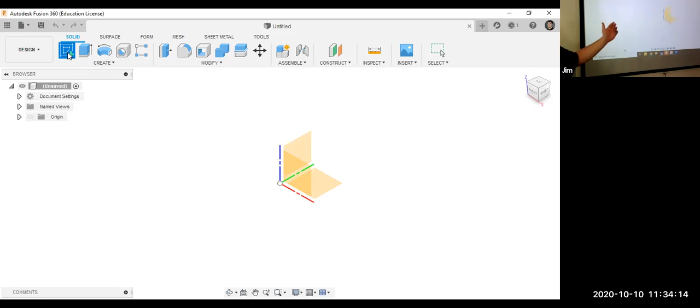So now that we're in the sketch plane, we can use sketch tools. The sketch not only defines our geometry, but it's also where parametric CAD gets its name. We can use parameters to define the dimensions of our part.

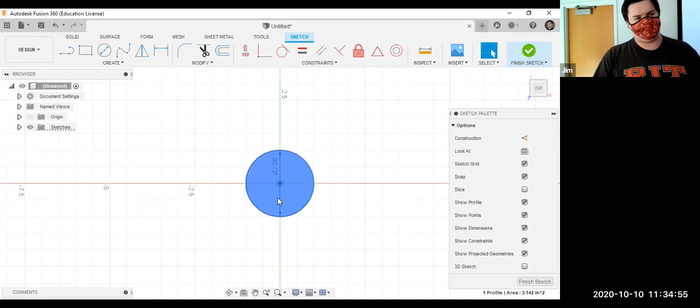So if I were to make a circle, let's say I think I want a pretty small rolling pin at first, maybe 2 inches across. Just type in 2, it's all set. Then if I'm going along doing some testing, I find out maybe 2 inches isn't big enough.

I can go in and modify the parameters of the dimensions to change that part. This applies to any dimension that you put on any part in the sketch, and it also applies to the 3-dimensional extrusion you do of a part.

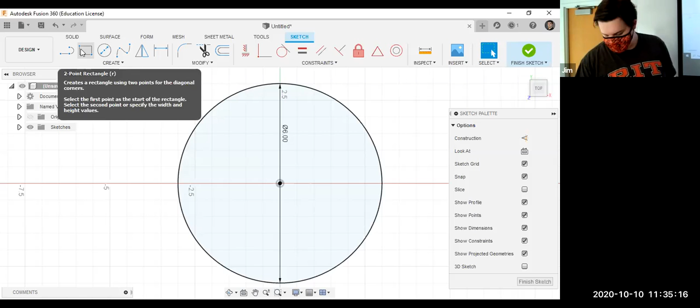You can always go back and edit your sketches later on, and it'll pull that change through the history for you. So if I had already modeled everything and then changed that from 2 to 6, it would just expand to get bigger in the final design.

Let's go over some of the controls for the cameras, and then we're going to do a basic exercise to try and design a part.

So for starters, working from left to right in Fusion, over here you have your browser. The browser is where all of your sketches and parts in this file will be. You can use this to help organize a very large or complex part into sizable chunks that you can select, hide, make selectable or unselectable, or make transparent if you want to work on a part behind them, etc.

Up along the top, you have your toolbox. In Fusion, 99.5% of the time, you're going to be using just the solids toolbox. Surface, form, mesh, sheet metal - those are all more for very specialized design concepts that we don't touch on too much. Within the toolbox, you'll find a couple of different categories.

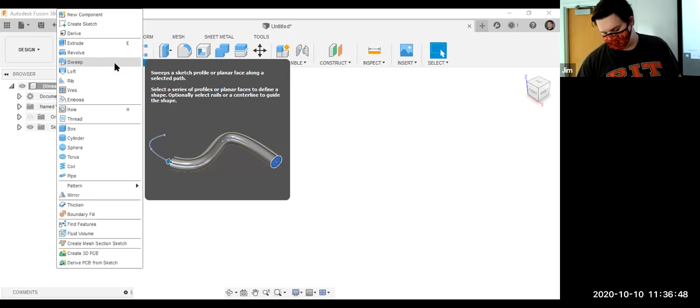Create is where you begin creating shapes. So if you have nothing at all, this is where you would create a sketch and turn that sketch into a 3D body. And if you needed just a very basic common shape, there are shape generators for that.

Once you have a shape, the modify tools let you manipulate it. Maybe you wanted to make it a bit longer, maybe you wanted to cut it in half, maybe you wanted to round over the corners so it's not a sharp piece. This is also where the move tool is, which is a very important tool.

For some of you just opening Fusion for the first time, your toolbar may not look like this. Some tools you'll have to go find in the drop-down menu, but that's inconvenient if you're going to be using a tool a lot. So for a tool you find yourself using time and time again, just click the 3 dots to bring it up to the toolbar, and it'll live up there as a button you can easily access at any time.

Beyond modify, we have assemble. We're not going to touch much on assemblies today, but just as a quick overview, this is how you join together multiple components in space. So if we have our entire assembly of the rocket, this would be how we define how the threaded rod connects to a bulkhead, connects to the body tube, connects to the fins, etc.

Construct creates things that are not really part of your model, but help make modeling easier. So let's say you want to make a sketch halfway between 2 edges of a part, or you want to make a sketch that's at a 15-degree angle to some part you already have. Using this menu, you can create new planes and new edges that you can then use to make sketches on.

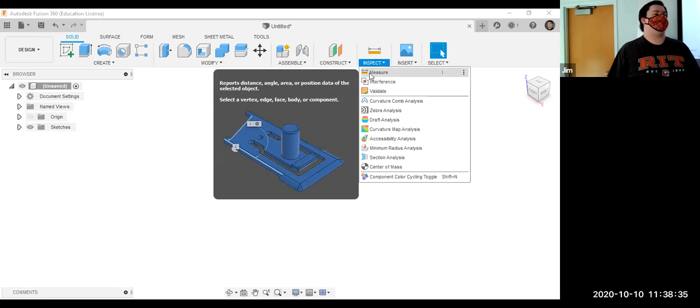And the last one I want to cover up here is the insert button. If you ever need to model something that's a little bit complex and there's no CAD model available for it, you can insert an image of it and then trace the image to get your final part in CAD. We do this a lot to get nose cones from OpenRocket into Fusion 360.

Any questions so far about the interface or any of the buttons that you see on screen?

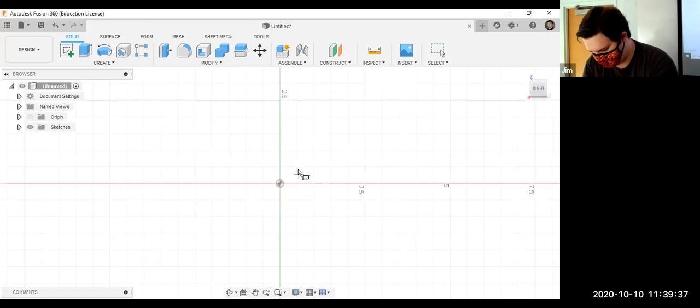One more thing to go over before we start designing a part is how to move your camera. Most of you are probably on a touchpad right now on your laptops, so it's not very easy to move your camera. Luckily, this little cube up here in the top corner is your view cube. You can click on any face to change how you're looking at a part. Let me quickly create a cube here so you can get an idea for how we're doing this.

See, by just clicking on one edge of the cube up here, it'll change our view of the part. This is also useful because it marks what your Z, Y, and X axes are in your design, which is critical for when you go on to manufacture your parts.

When I was messing around with Fusion before, something that annoyed me that was different from AutoCAD was the snap points. That was very different and was difficult to learn how to maneuver objects so they snap to where I wanted them to.

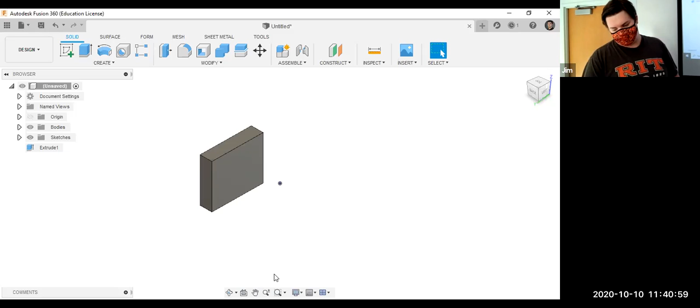Yeah, the snapping in Fusion will be based on how far zoomed in you are to your part, which can be a bit weird at times if you're just on the precipice between 2 different levels of snapping. So if you ever find parts are not sticking where you want them to be, you can hold down the Shift key and it will turn off snapping altogether. Or the Control key will set a fixed snap size. You can also modify a lot of those settings with this small settings menu down at the bottom - your grids and snaps, you can change your snap grid and grid settings.

All right, now that we have a basic overview of how Fusion works, let's go ahead and make a part. I'm thinking something pretty simple. How about a die, a singular of dice? So who has an idea of how we would start to make something like this? Cube. We could start with a cube, yep.

We could do create, and then box, cube, same thing, and pull that out to the shape we want. We could also create a sketch, draw a square, and then extrude it out to the third dimension. Yeah, so whichever one works best for you. For a shape like this, it's simple enough that we could just do it with a box.

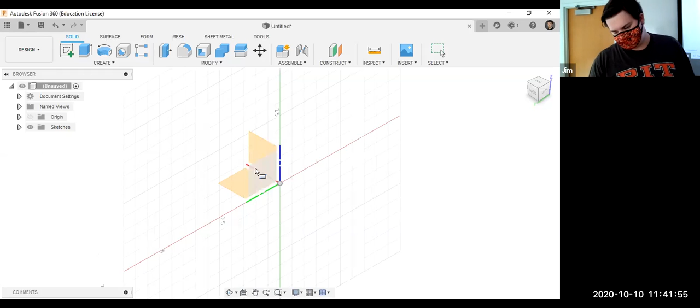Does it create like a hollow box or a solid cube? Creates a solid cube. I think it just calls it box in case there's like, it's not the same dimensions on all three sides.

Yeah, so let's make a die. Also, how do you change from metric to... it's a good question. So if you ever want to use both, if you're typing in a dimension, you could put in like 4.7 inches or 3.7 millimeters, and it will do the conversion on the fly. To update the default for the file as a whole, you go to Document Settings in the browser, select where it says Units, and then choose your new units from the dropdown. If somebody asks a question, they should repeat it. That's a good idea.

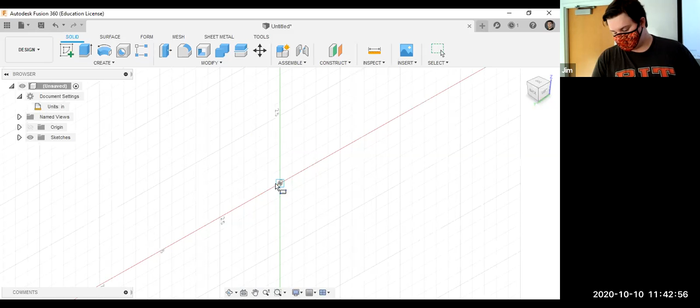All right, so let's make a die that is about 4 inches on all sides. So I can sort of drag the box out into space, type 4 in for the first dimension, hit tab, and then 4 for the second one. And then I can type in 4 for the thickness to get my cube.

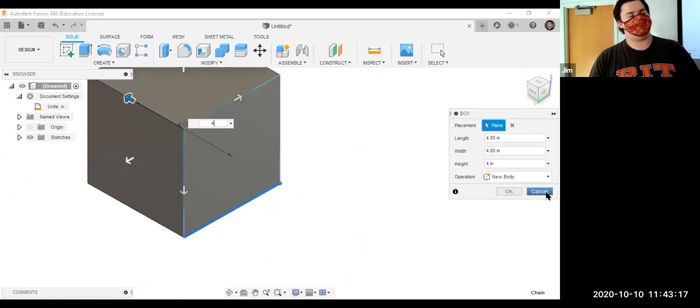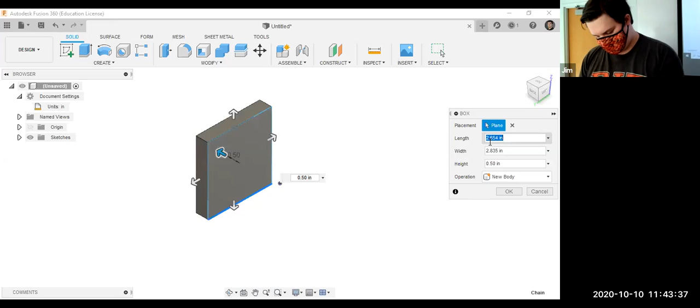Now in your sketch, if you accidentally typed in 3, or you didn't type in any set number, you can just double click on the dimension to modify its value. So if I do that again, or you could also, in the box tool, use the box length and width settings. Like that.

Now you notice at the bottom, it says operation. Most of the tools you're going to use will have an operation selector, and the two most common you're going to use are new body and join, and maybe sometimes cut, depending on what you're doing. New body, as the name implies, makes a new body. If I were to use the join tool, it would take the two bodies and sort of weld them together. And if I was to use the cut tool, it would subtract one body from the other.

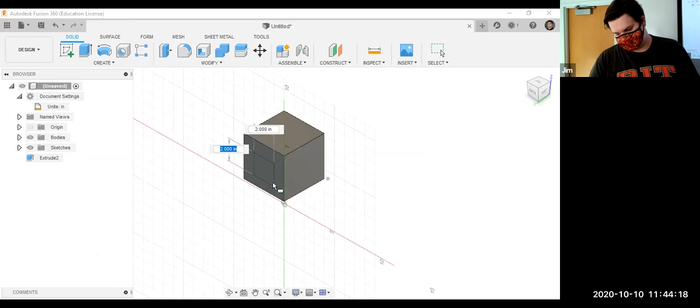So if I wanted to make this a hollow cube with maybe an opening on one side, I can draw another box here and select cut, and you can see it's going to cut away the inside. Or if I wanted a cube with a part sticking out the side, I can do that and then set the operation to join. For now, let's just stick with the single cube.

Did everyone get a cube? How do I move the screen? You can move the screen by selecting the pan tool at the bottom, and then when you're done with it, just press escape. If you have a mouse, it's middle mouse click and drag.

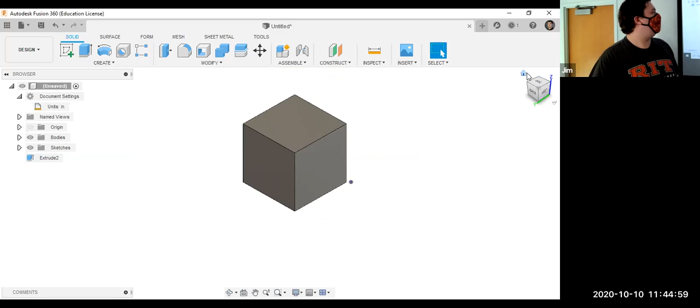If you've lost your part, how do you get back to it? If you've lost your part, you can click the home button up here, and it will bring you back to a default view of your part. So if you ever zoom way too far in, way too far out, and get lost out in who knows where, it'll bring you right back.

Hey Jim, how do I change my default home view? If you want to change your default home view, just go to some new view that you want to set, right-click on the home, and then set current view as home.

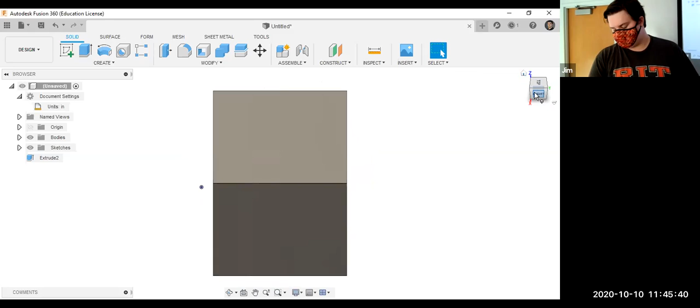For the views on the view box, there are no keyboard shortcuts. Normally you'd be using a mouse instead. To see if anything has a keyboard shortcut, just hover over it and it will tell you. So press pull has a shortcut of Q, fillet is F, move copy is M, delete is the delete key, etc.

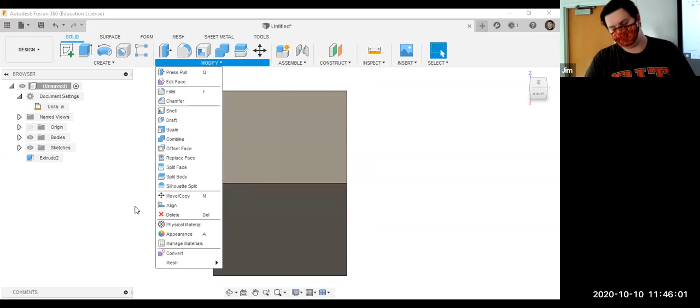What is form, like create form? So click on that. Gotcha. So the question was, what was create form?

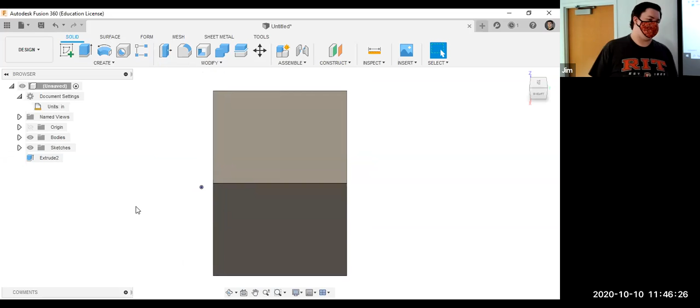In Fusion, we're using right now the traditional parametric, draw lines, extrude things toolbox. Form is used when you are modeling maybe a natural or ergonomic part, like a computer mouse or the handle for a tool. In form, you start with a blob, and then you can press and pull on points of that blob to curve it into the final shape you want. So it might not necessarily be dimensionally accurate, but you get a better surface curvature than you can by just drawing lines.

If you want to get out of the form menu, you just delete the form on your browser and then select solid up at the top.

What's that? Form isn't an option, right? Form is not an option. It's not on top of here.

Interesting, are you using the educational license? I got no idea, that might be why. As students, you get access to pretty much all the tools in Fusion 360 through your educational license. If you signed up using a personal Autodesk account, you only have your personal license for Fusion, which severely limits what you can work on. You'll really see this if you go into manufacturing—the student license can do a ton more in CAM than the free version can.

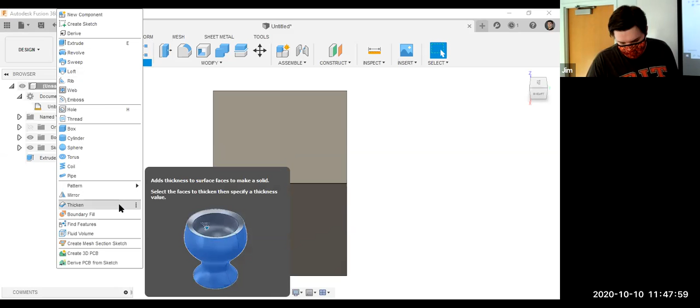Yeah, I have the educational one. It's under the, like above create, there's a purple cube that says create form. Ah, and then it'll take you into. Oh yeah, I see it now. So you probably just have, did I hide it on mine? You have a different tab that says form.

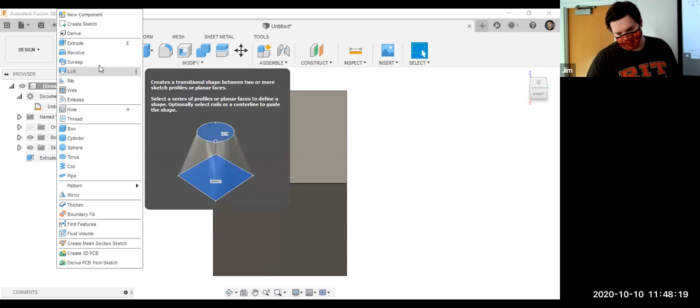Interesting, mesh. So if you have a create form tool up in create, you can hide it if you want by just selecting it and dragging it out, or leave it there if you ever want to use it again. What did I just take off of there? Was that extrude? There we go, move that back. Perfect.

So any more questions about designing the cube? We all got that? Awesome.

Now right now this cube looks sort of boring, just gray. By default, every part you make in Fusion will be out of steel, so it has this very boring gray look to it. For making simple parts that's okay, but if you're making something very complex, maybe you want to know where the center of mass is, you can modify the physical material.

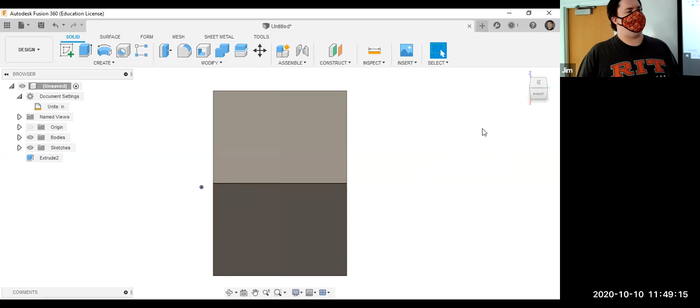Yes? Blue? Do you have it highlighted right now? How do I tell? Just click and drag somewhere out in space. No, it's not highlighted, very strange. Material? Well, let's see if maybe you have a different default material then.

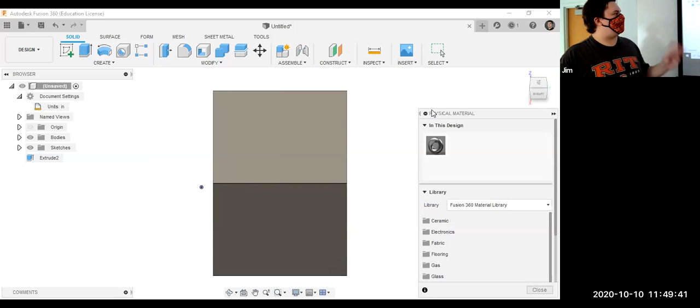So if you go into Modify, Physical Material, this is the Physical Materials Settings menu. This is very important if you're trying to do any center of mass calculations for your model, or if you're going to be doing any renders and animations of your part. If everything is just steel, it looks very bad because it'll just be a very dull gray all the way through, and it also makes it hard to differentiate between parts in a multi-part assembly.

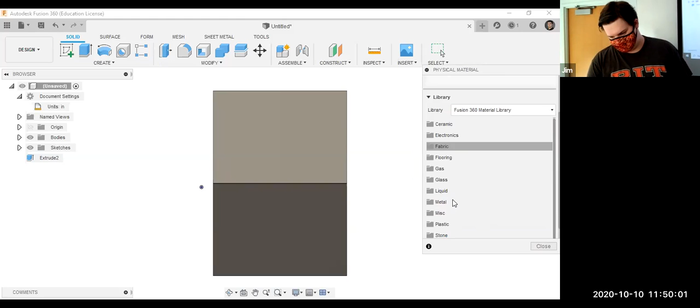So let's change our die to be white plastic, that works. You can go under plastic and see a preview of what each of the physical materials are going to look like on the side. Now if you look closely, you'll notice some of these previews are like a donut shape, and some are a solid sphere, like the clear acrylic. The difference is that anything with a donut shape is a solid surface, so if I were to change this to acrylic, it'll just be that gray color.

But if I was to change it to acrylic clear, I'd be able to see through the part and see the components behind it.

To change the physical material of a part, let's say I want to do this one as ABS plastic—you can click on it and drag it to the body. Or if you want to modify a lot at once, you can click it and drag it to where the other material is in your palette. So say I had 20 parts made out of steel and another 30 made out of aluminum, and I wanted to change all the steel parts to aluminum, I could just drop the aluminum right on top of the steel and it'll change it all for me.

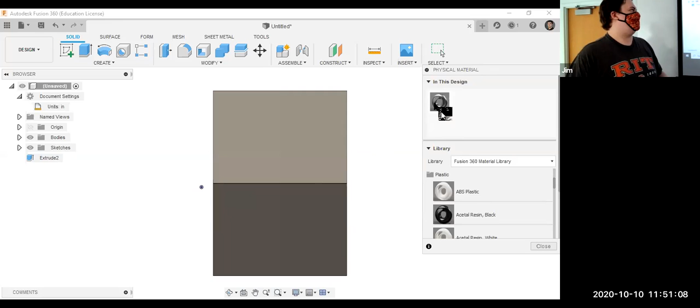It looks a little bit better. Now, what if you wanted to do something that was not critical for the part, but you just wanted it to look nice? Maybe you wanted something that looks like water, or a very glossy paint or powder coat, or even a wood finish.

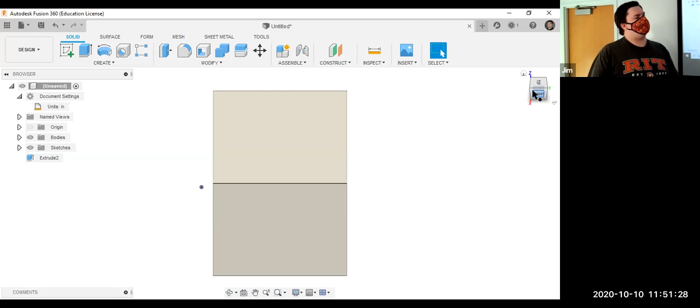Under the Modify tab, there's also the Appearance menu. While your physical material defines your center of mass and the default look of your part, appearances will override the look of the physical material, but not the physical properties.

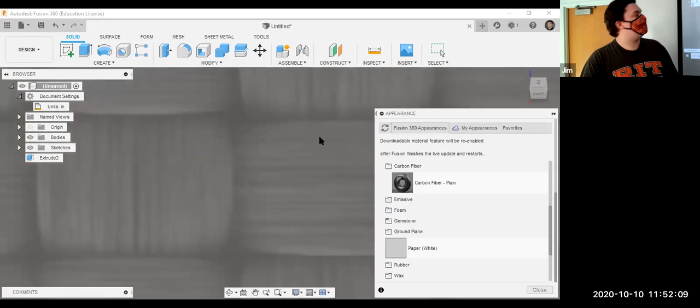So if I was to change this cube to look like paper, it didn't change much, did it? Let's find something a little bit weirder. Here we go, carbon fiber. Now the cube has the look of carbon fiber, but it's still going to have the same mass and strength that it did as the plastic part.

How do you make it? I just chose carbon fiber and then dragged it over. So go ahead and choose some appearance that you like for your die. It can be whatever you want.

Some of them, like the woods here, you see how instead of a donut shape, it's a cube? That means it has some special grain texture to it. So if I was to put the walnut on here, you can actually see the part has a grain.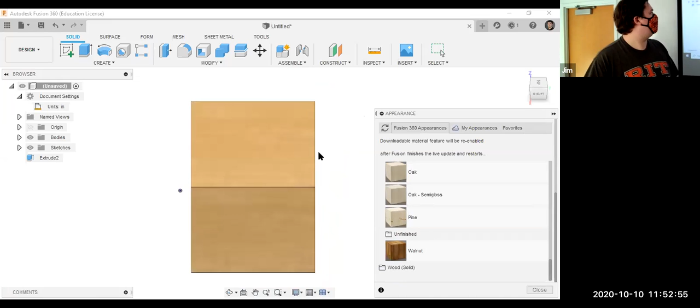And when you go and render that, you can't see that at all, can you? You can barely see it there. So if I was to go and make a render of this part, it would actually cut the grain pattern to make it look like a raw piece of wood.

So I'm going to do paint. Make it carbon. What's that? Make it carbon. I just chose carbon fiber under the carbon fiber menu and then dragged it over.

You might not have carbon fiber as a default. Fusion only downloads a certain number of the models. It's under miscellaneous. There you go. You can also make your own appearances.

Maybe you wanted like red carbon fiber. You can modify an appearance under the My Appearances menu, but that's a bit advanced for today. Let's just stick to the defaults.

Don't we need to fill in the edges? Because the dice actually have rounded corners. Yep, we're going to get to that as well. Don't worry.

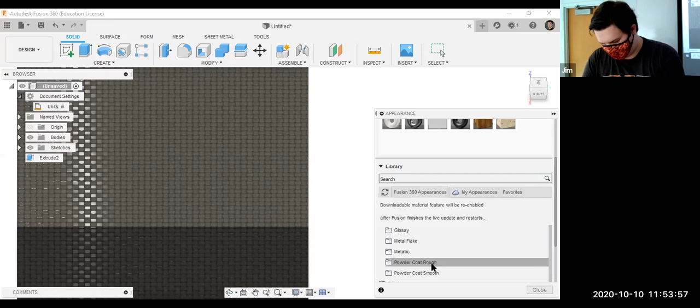So I'm going to make mine powder coated blue. Or I won't actually, because I can't do powder coated blue. You need to download them. Yep, I can't download because I'm running an outdated version. So I'll keep it as carbon fiber.

So obviously, like it was said, this doesn't look much like a die yet. So what do we still need to do? Need to put numbers on it. Need to clean up the edges. So let's put our numbers on first.

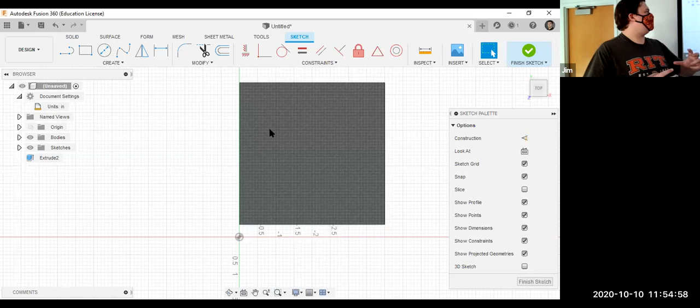To do this, we're just going to make a small detent on the top of the part. Now, since we have 6 faces, let's do this a few different ways to show off how we could do this. So the first way we're going to do this is click Create Sketch and click on one of the surfaces of your cube.

Your view will auto-adjust, so you're looking head-on at the cube now. Let's make this the 1 spot. Well, I can do that. It didn't automatically adjust your view? No.

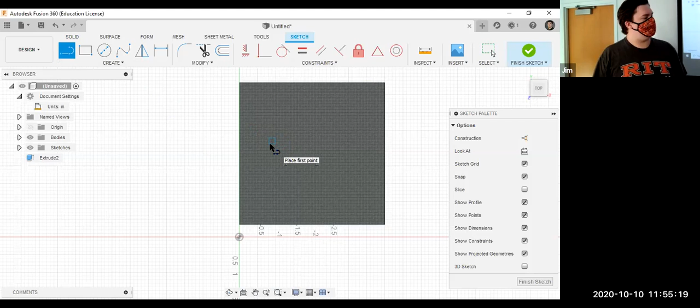Is there a sketch on that surface, though? Can you see the sketch plane? Yeah, seems to have auto orient turned off for some reason. You should change material, this is hard to see. Ah, got it.

So if we're going to make the 1, obviously you need to have it centered, right? You can't just put the hole wherever you want. There we go, that should be easier to see. So how are we going to find the exact center of our part?

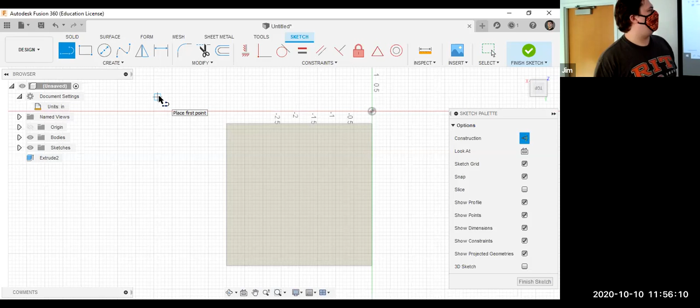What we can do is grab the line tool and press X on your keyboard. This will turn on that little blue box on the side there. You can see it blinking on and off, labeled construction. So a construction line, if I were to draw one out here in space, we zoom in - see how it's a dashed line instead of a solid line? That means that if I was to draw a shape out of this, it wouldn't do anything.

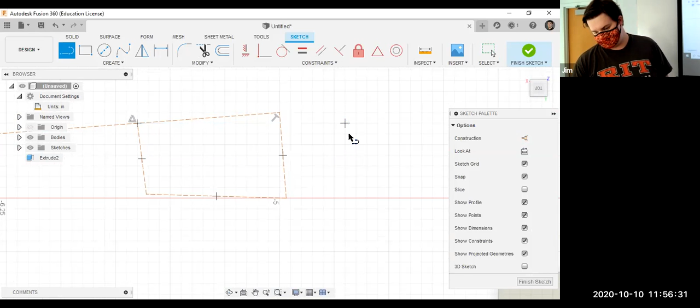But if I were to draw a shape out of real lines, it would treat it as a part that I can extrude. Construction lines are useful for aligning your parts and aligning your sketches, and then changing back to real ones to make the actual geometry you want. You press the X key or press construction on your menu on the right.

What's that? I just knew it was the X key. I just realized it doesn't actually tell you when you mouse over. I will say, why is that?

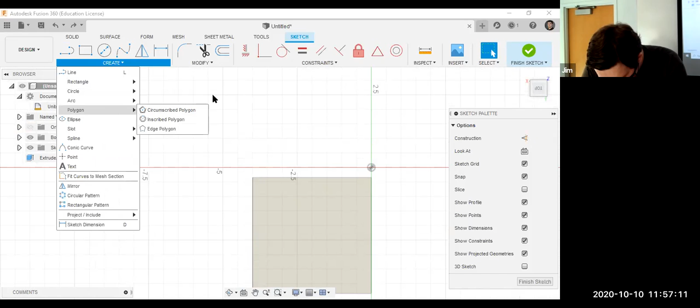So let's find the center of our cube here. We could do this by drawing a line from corner to corner, corner to corner, and where the two meet up, that'd be our center. Or if I choose the line tool and move my mouse along the top here, see how it suddenly snaps to a point with a triangle? That means I'm at the midpoint of that line. So I can click there to start a sketch, and now I'm equidistant from either side of that edge.

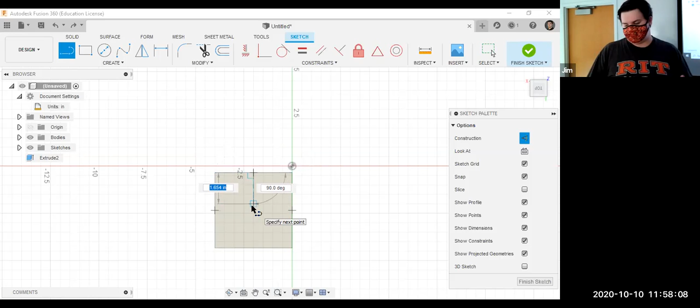You can also see the little crosshair that showed up on the other edges of the cube. Since Fusion assumes we're trying to find the center of something, it will automatically pop those up. So what I can do is just move my mouse over it, and you see how I now have a second dotted line at the bottom? I can then move it until we are perpendicular and click. Now I know that point is in the exact center of our face.

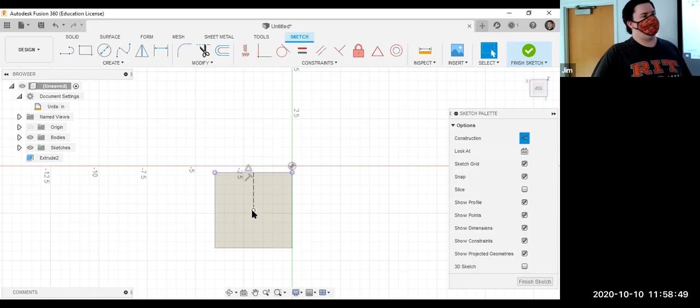Let's just wait a second for everyone to catch up. Now, seeing as our cube is 4x4x4, can we just find 2x2x2? You can do that as well, yep. There's a lot of different ways you can do this. One benefit of doing it this way, though, is if I were to modify the size of this cube, it will keep that line at the midpoint, no matter how big or small the cube is.

The question was, how do you turn on auto orient? I believe you click the look at button underneath construction. You could also just select which side of the view cube you want to be looking at that the sketch is in line with. And you can rotate it by just using the two rotates here.

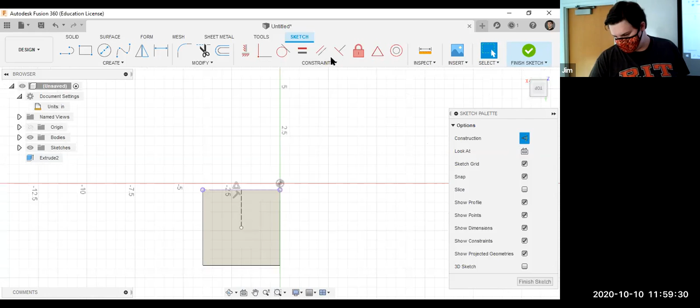Do we have a chat? No, that was me. Ah.

So does everyone have this center point? Is it giving you a specific issue? Well, I'm trying to draw it and then I end up all the way on the opposite side of the cube. You might be just looking at the wrong face of the cube.

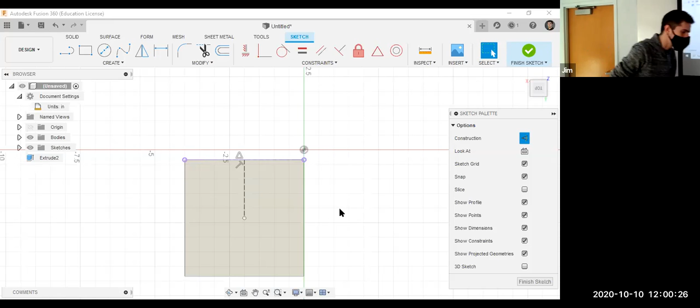Let me just make sure everyone's got this. You have to go to sketch, choose the line tool. And then sort of put your mouse over the edge of that one, so you see a triangle, and then drag it back over. And there you go. Then hit escape and click over here. All right, does everyone have that?

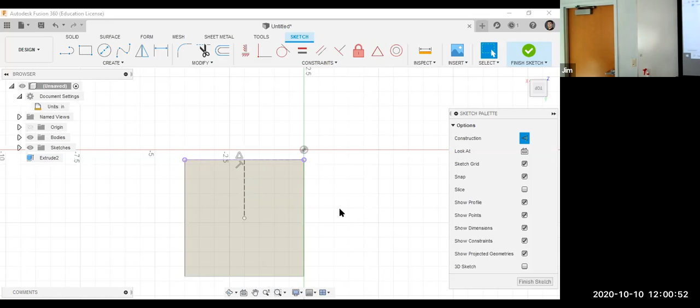Awesome. So now let's go over one of the ways we could make our mark at the top here. If you ever look at a real die, it's going to have a semicircle cut into it.

So to make a semicircle, we can create a sphere at this point and then combine the two bodies, with the sphere cutting the cube. To do this, let's go, instead of the sketch menu, to solid, create sphere. Then we can click on the dot we just made, and it will make a sphere around that center point.

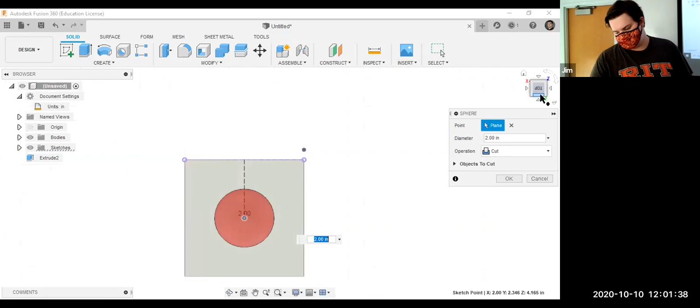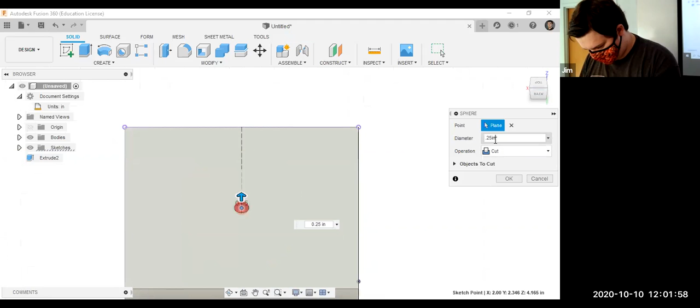If you zoom in close, you can see it's going to be cutting away a good amount of that material. So let's set that to be like 0.25. Oh, didn't like that. 5 inches? Nah, maybe 0.5 inches. There we go. Once you have that to a shape you want, just click OK.

So now if we look at our part at an angle, you can see we have a semicircle cut into the face. Any questions about how we did that? Anyone get stuck?

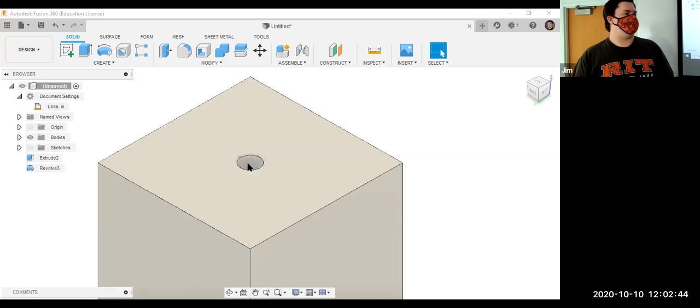All right, let's now do another side of the die with the two dots, but let's do it in a different way. Choose another face, create the sketch. How would you cut the material?

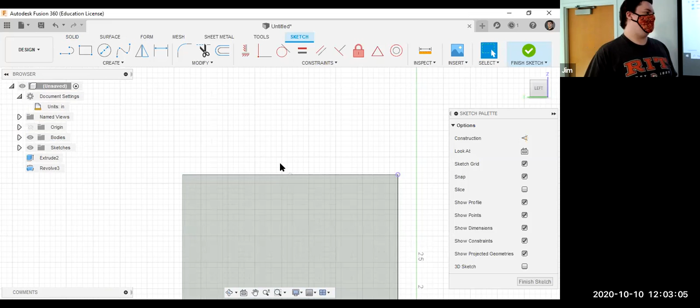When you create the sphere at the bottom, there will be an operation selection, and you choose cut from there. If you created the sphere as a body instead, you can use the combine tool under modify. Select the two bodies and use cut as the operation. If you had selected new body instead of cut when you made the sphere, you would have to go in and manually combine the two. That's how you should do it.

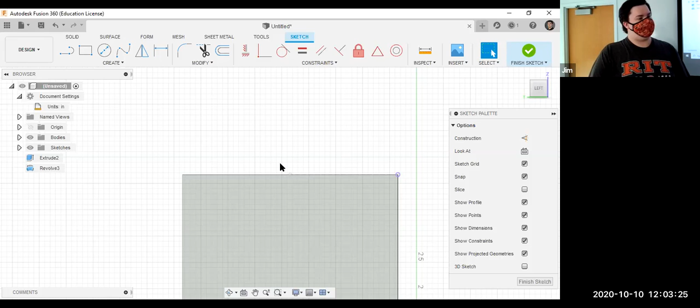All right, so now let's make this side of the die as if all we had was a drill press. We're just going to drill a hole straight in and out, whatever side you want. I believe there is a proper standard for which way the numbers should be in relation to each other on a die, but that's not important for what we're doing.

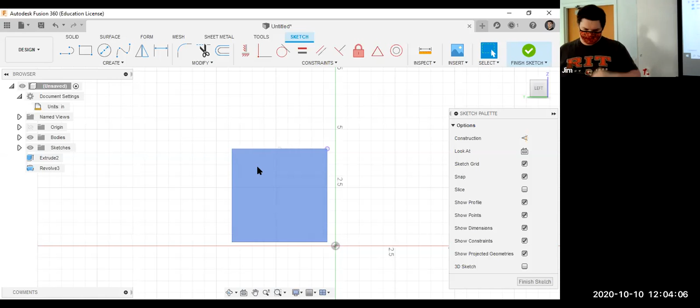Now, can you pull up a picture of a die? I just want to make sure I'm doing this right. What does the 2 side of a die look like? Is it diagonals, like the 4 but just two dots? Yes.

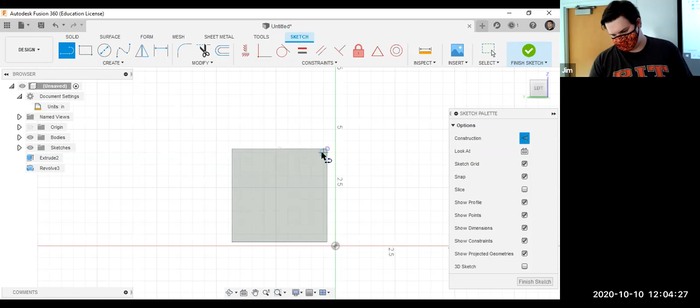Okay, so let's do this using the mirror tool, since we want the two dots to be equidistant from the edges. To start with, we're going to need a line right through the middle of our part. Since we're going to have a dot in the top corner and a dot in the bottom corner, let's draw our construction line from diagonal to diagonal.

Are you in a sketch? You have to get the sketch menu, you have to be in a sketch. You create a sketch on a face, and they should pop up automatically.

Awesome. So to make a symmetrical part, or to use the mirror tool, we start by defining some line that we're going to mirror across. Then let's draw our geometry. Just like before, we're going to want to make a dot at some location, which we'll then use to set up where our drill will be. So I'm going to just do a construction line from this corner and bring it in. That looks good.

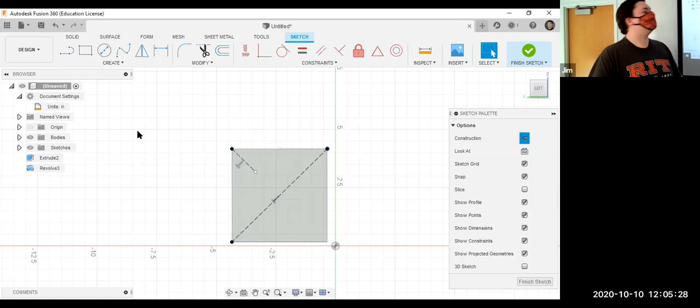Let's just wait for everyone to get that. All right, and then to make this into an actual hole. How far did you bring that in? However far you want. I put it in 1.4 inches.

Is there a point tool? So the question was, is there a point tool? There is a way to make a point just on a line anywhere you want. Ideally, though, you'd always want to use a point that's at the end of some line so that it's geometrically defined, because just putting a point on the line, it can slide wherever it wants along the length of that line. Since this is the end point of the line, I can't move it. It's stuck there.

Alternatively, you can dimension the point on a line. Is there a way to say I want this line to be 3/4 of the distance from the corner? You would have to make two half intersections. So what I did was I took a point from the corner to the center of the line, and then just took that automatically set value and divided it by 4 and multiplied by 3.

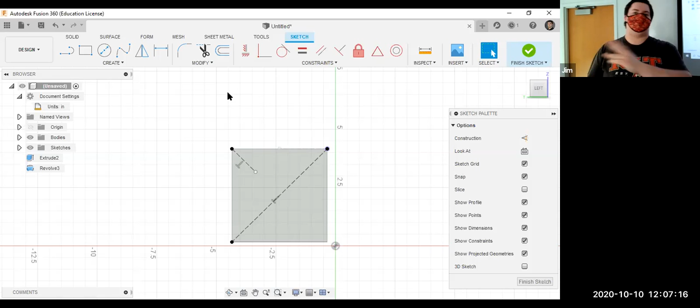That would work. If you already had a sketch line that went all the way and you wanted to get a third of that sketch line, you can set up the dimension to be d2 divided by 3 or something like that. Although in general, it's best to avoid those, since if you were to go back and tweak that one, it might cause other things to suddenly change when you're not expecting it.

So now everyone should hopefully have a point somewhere out in the corner there. We're going to click the C button on our keyboard or select the circle tool from the top, and we're going to make a circle here.

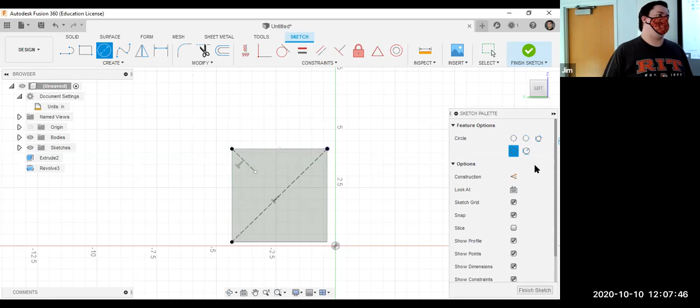Now, if you notice when you open the circle menu, over here there's the feature options. By default, when you choose the circle tool, it'll ask you to define a center point and a diameter. But maybe you want to make a circle that's defined by 3 points or 2 points and a distance. You can change the selection mode by clicking on one of the feature options. Hovering over will give you more information about what it's going to do.

So if I was to do a 2-point circle instead of center diameter, it would ask me to select one point, and the diameter of the circle would be based on wherever I put that second point. For this, we're just going to use the center diameter, though. And let's make that 0.5.

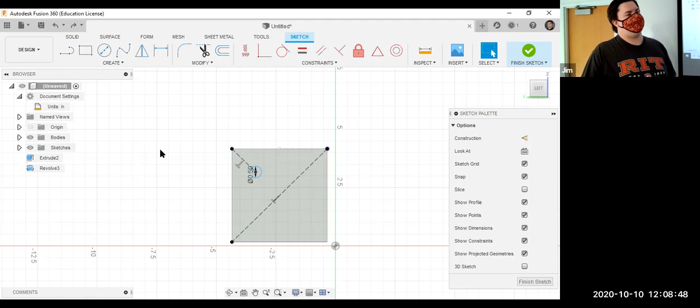Perfect. So you're going to do center diameter, call it a half inch or so. Now, when you make your circle, do you notice how it's blue instead of black like other lines we made in the past? That means that this circle is underdefined.

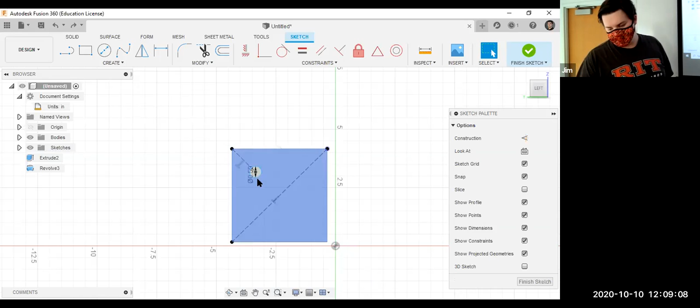The easiest way to do that would be to use a coincident constraint at the top. We can just choose two things and tell them that those two cannot move relative to each other.

You could also do something like, maybe you had a circle inside of a circle. You can constrain one circle to the other circle using a concentric constraint. By default, Fusion 360 will generate most of the constraints you need, so it's very rare that you have to go in and add them manually.

Now that we have that circle constrained, let's create our second one. Like we said, we could go in and just draw a line, draw another circle, and do it that way, but we're going to use the mirror tool.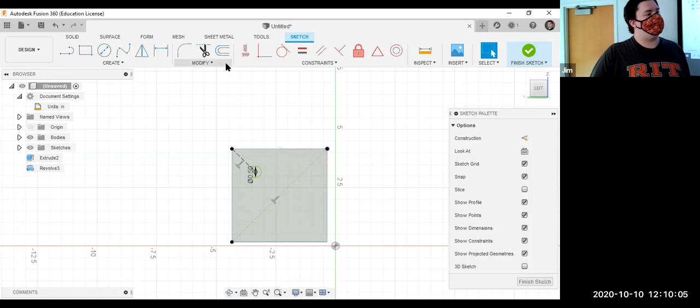That's a good question. The question was, should we cut first? At this point, the order of operations doesn't matter too much. What we could do is cut the hole, then copy the hole over the mirror line, or create a body, copy that over the mirror line, and combine them all, or copy the sketch and extrude both at the same time.

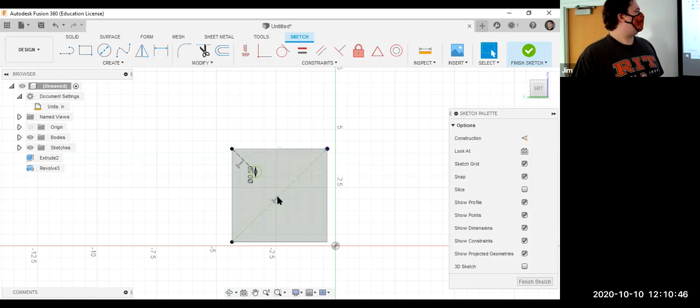It really comes down to what exactly you're working on. For this one, I would do it in the sketch plane, because if we were to make that a cut through, we would then need a plane to mirror them across, whereas right now we just need a line since it's a sketch. If you were to do it by making the hole, you would then need to define a plane from the construct menu and use that as your center point for the mirror.

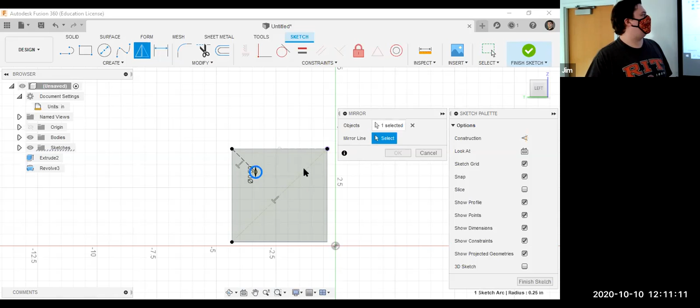So to mirror the sketch, we're going to go to Create, Mirror. You can see first it's going to ask us for the object we want to mirror. We want to mirror just that circle, and the mirror line is that one. Once that's done, we can click OK, and now we have our two circles.

Did you select a mirror line and an object? How do we select that?

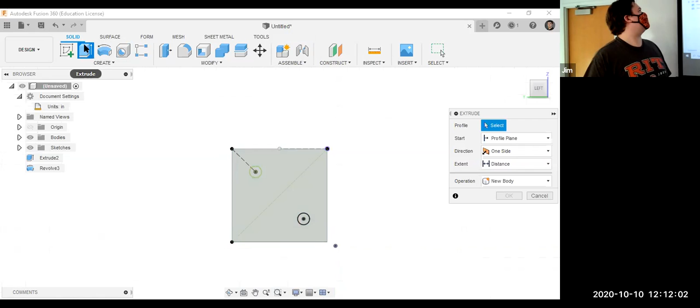All right, and then once you have those two circles, we're going to go to Solid, Extrude, and we're going to extrude them down some distance. We go under Solid, Extrude at the top, and then we can select the two circles, and we can say that we want them to go in.

How do we select the circle? You just move your mouse over the circle, and it'll light up blue. When it does, it selects the entire square.

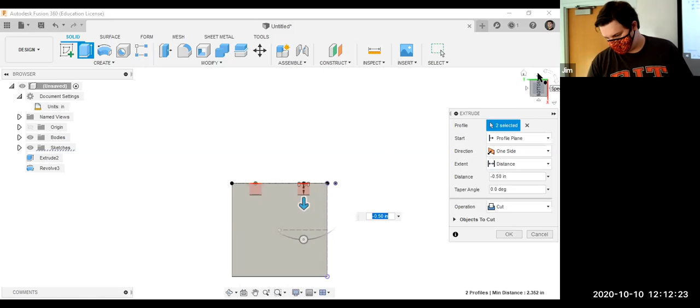So it might be that your sketch is hidden then. If you go to Solid, Extrude, are you saying that it's doing that instead? Yeah. So what you want to do then is, over here on your browser, next to where it says Sketches, see if there's an eyeball or not. Yeah, there is that one. So you can see your sketch on the top of your part.

So can you see the two circles on the top of your part like this, or does it look like this? Yeah, I can see it the first way. Okay, so then what you're going to want to do is, when you go in to do your extrude, make sure you zoom in and select it.

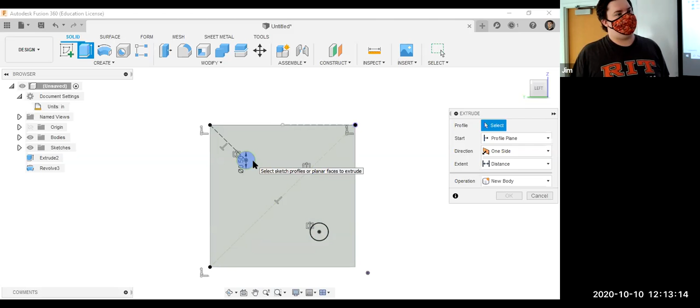If you still can't highlight it, it's possible that your circles are construction lines instead of real lines. When do we make them? When we stop making the reference lines, it's okay. What you could do is just select the circles, close out of this, select the circle, and click the X key to change it from normal to construction and vice versa.

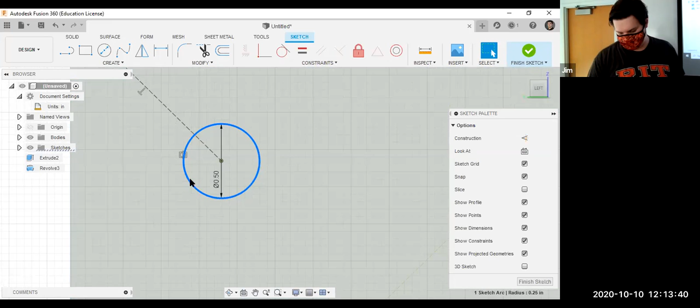So if it's construction, it would look like that, the dotted line. We want it to look like that, a solid line. All right, now I can. All right, so now you should be able to extrude those down.

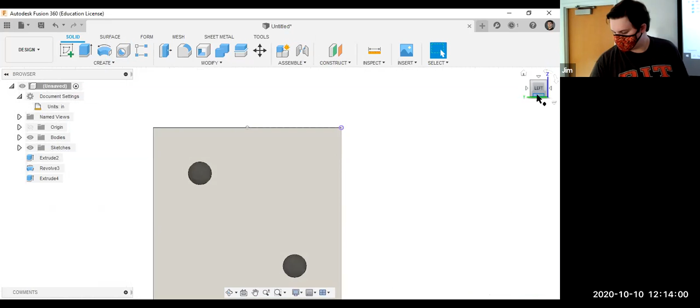So we're going to select the two and give it a distance. I put a 1/2 inch. So what do you guys think so far?

Not too bad? Now, when we extrude them, are they semi-spheres? No, these will just be a cylinder straight down. So this would be more representative of if we were to take an end mill and machine out the part.

So what if we wanted to make those semi-spheres? You would just use the sphere like we did on the previous ones.

So the last thing we're going to go over before we break out into our first practice exercise is modifying things. This die in its current state looks like it'd be a bit painful to use. It has really sharp edges on it. So let's smooth those over.

When we're working in CAD, there's two ways that we can break an edge, so to speak. The first way is with a fillet. So if you go under Modify, Fillet, you can then select a couple of edges and drag the arrow, and it will curve them over with some set radius.

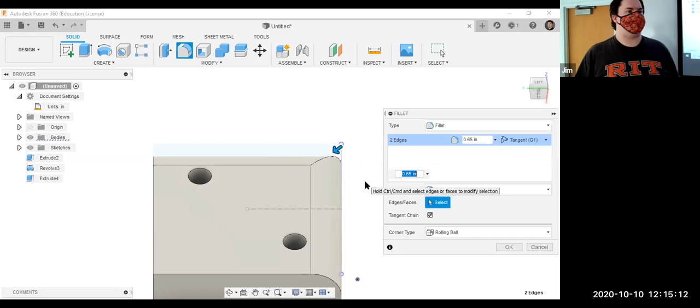If you wanted to add more, it takes them out of this fillet selection. You can hold the Control key and then click on edges. This will also work for the edges of a hole or something similar. And Fusion will just do its best to try and resolve all of those curves.

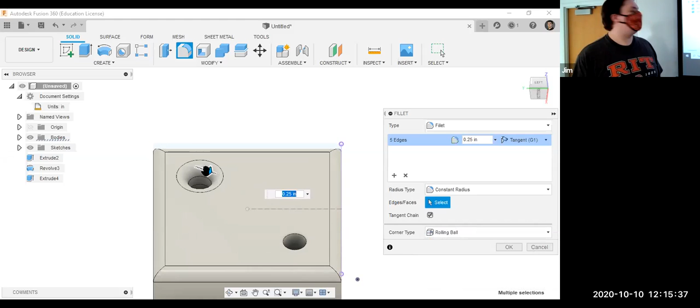So let's put like a point, I don't know, 0.12. That looks good. I did have a minor difficulty. How did you get that? The Fillet tool. It's under Modify, Fillet.

So that looks good. This would be fine for 3D printing, but if we're going to machine it, maybe we want it to just be cut at an angle rather than being a rolled over ball. For that, we're going to use the Chamfer tool.

So it's the same idea. You'd go to Modify, but this time select Chamfer. And it works the same way, where you just give it a distance and it will cut it at an angle.

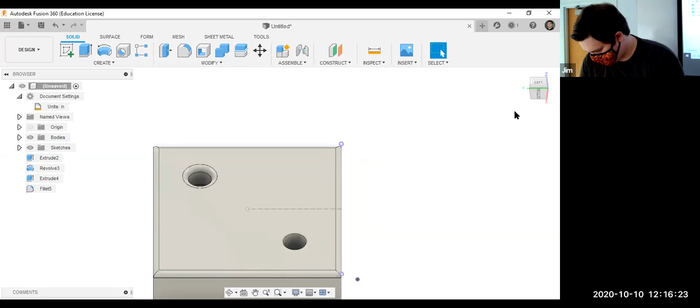So what do you guys think? Good? Cool. So how about we do a bit of a challenge then?

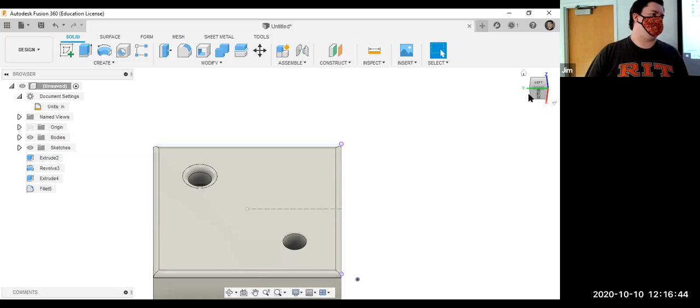And let's make a drawing on the whiteboard.

All right, so here's your guys' challenge. How many of you built your L1? Some of you. Who built your L1 yet? Is there at least one person in each group?

Yeah, everybody's. Okay. So your task is to make a tool to help align the fins as we put them onto the L1. Did someone in your group build an L1 who can sort of describe the process?

That's what I'm going to tell you right now. Okay. So the rocket will have a radius of 4 inches, or sorry, a diameter of 4 inches. The fin will have a thickness of a 1/4 inch.